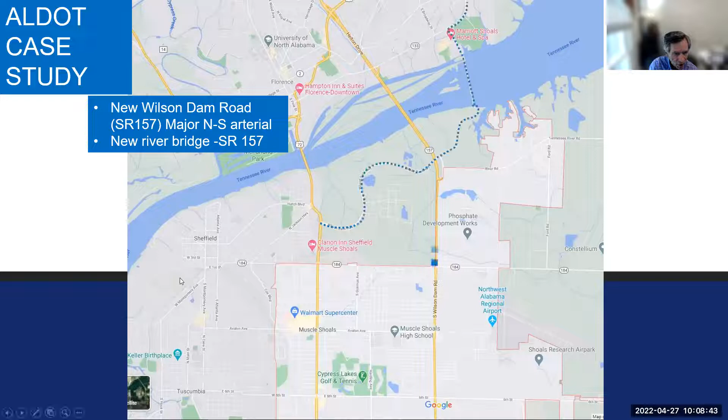When we left off yesterday, we were talking about a project in the northwest corner of Alabama. It's basically a new alignment for Alabama 157, State Route 157, which became a second major crossing over the Tennessee River. Before this project was built, there was basically one primary arterial, US 72, over the Tennessee River, so there were a lot of routes converging in this area with a single river crossing on US 72, aside from the 2-lane road over the Wilson Dam.

So we were going to look at this. We went through these slides yesterday and looked at the old Wilson Dam road, just a simple 2-lane road. If you recall, it went over the Wilson Dam—I think it was very narrow lanes. Speed over this dam was probably about 20 miles an hour tops. It was very narrow lanes—I don't know the exact width, but very, very narrow.

This is a shot of the new roadway, Alabama 157, the additional river crossing that was built—I'm not exactly sure when, probably 15 years or more ago. I don't know the exact time frame, but it's been there for quite some time. You can see here it's got shoulders, a raised median, curb and gutter on the inside, improved paved shoulders, rumble strips on the outside. This is just an overhead shot from Google Earth, Google Maps of the facility. You can see it's a full width bridge with shoulders, 3 lanes in each direction, and it actually has a protected pedestrian area over the river.

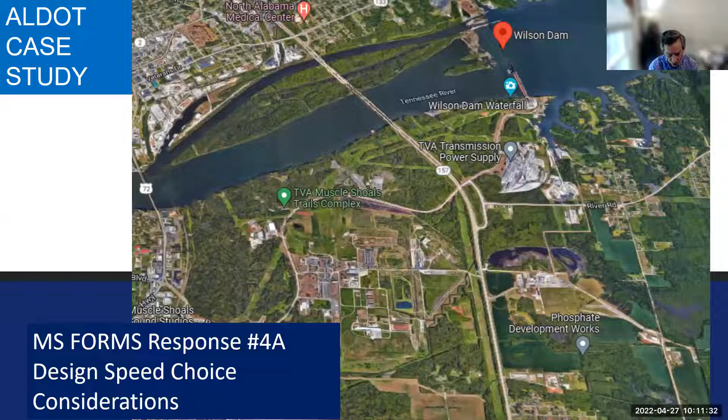So what I'd like for you to consider—and we're going to bypass this, guys, on 4A, we're not going to use that link, so no need to put that in there. I think to expedite this process, we'll just do it over chat. So thinking about the roadway, what are some things you would consider as far as selection of a design speed? Are there some overwhelming things that would be of concern to you?

It is relatively level on this roadway. Even though it's in an area that has a lot of change in elevation around the river, in this area south of the river it's fairly level, maybe rolling a little bit away from this particular route. But anyway, it would be considered level.

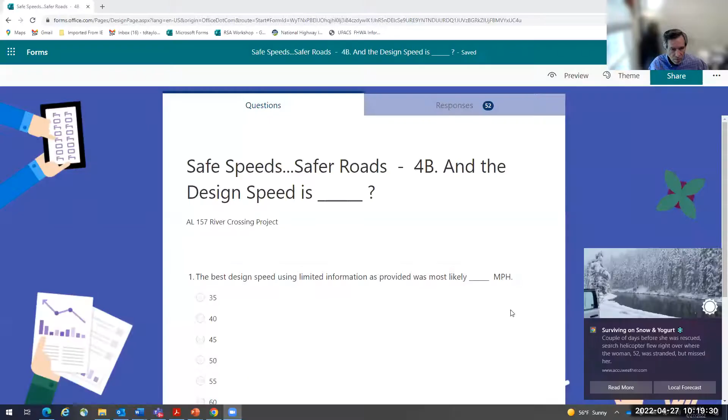Let's call this for the selection of the design speed and see what we got here. All right, looks like the winner right now is 45 miles per hour for the design speed, followed by 50 miles per hour getting a good number of votes. Trailing that is 55 coming in third, and 40 miles per hour coming in fourth place, with a few choosing 65, 60, and even 35.

So for those who chose over 45, that group is about the same size as the group choosing under 45 - it's pretty close. So it's interesting that these responses show the winner is 45, with 50 coming in second, then 55.

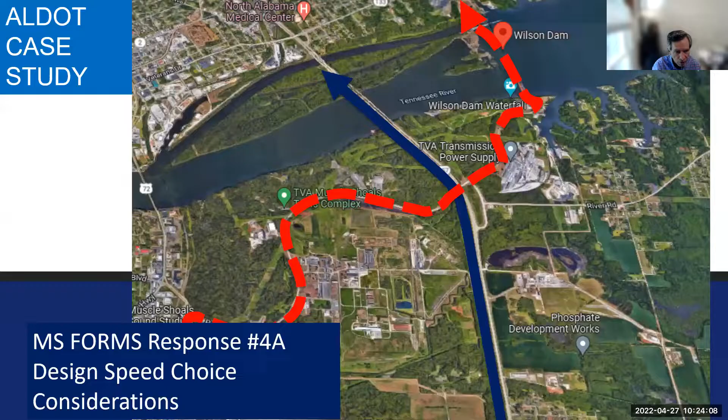In this case, this particular photograph shows 7 lanes, and going back to some of the other ones, from this perspective it was 3 lanes. Again, the look and feel of the roadway, I think most everyone would agree, suggests more than 45 miles per hour.

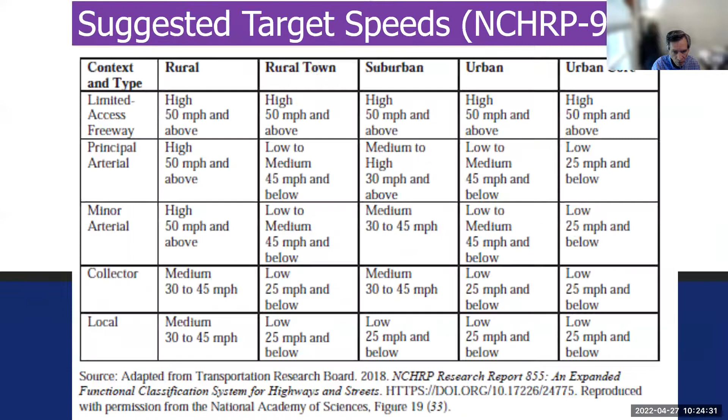So what happened is a speed study was conducted, and the speeds ranged anywhere from 54 to 63 miles per hour operating speed, with the average probably lower but an upper range of 63 miles per hour. Using the information available at the time, the speed limit was changed to 55 miles per hour. I think the point here is that design speed is not always a good predictor of operating speed.

Now, target speed is an attempt - not to blend the two - but to design the roadway in such a way that you achieve a desired operating speed. On this particular roadway, you have to ask: is 45 a desirable speed for motorists, given the context, et cetera?

Some would probably say, well no, it's really not, it should be a little higher. There are some that would say it should be a little lower. But the range of speed that was chosen, this 54 to 63 mile per hour range, was generally the range of speed selected by the motorists.

Certainly as development comes along here, it's good to change some of this, with more access and things like that along this roadway. There may be a need to recheck the speed, pending any change that might occur along the roadside environment or the roadway itself. So that's just a deeper look into the difficulty of making a comparison between the design speed and the operating speed, as pointed out yesterday.

All right, so in this module we're going to look at the different aspects of some of the current methods of setting speed limits. We're going to look at some of the injury prevention considerations for all users, approaches that deal with setting speed limits, such as safe systems, trying to minimize the injury that occurs when crashes do take place. How can we minimize injury by looking at speed and considering all users?

We're going to look at the 85th percentile, and some agencies consider that the gold standard, so to speak, and use it strictly, while others just incorporate it along with other considerations and factors.

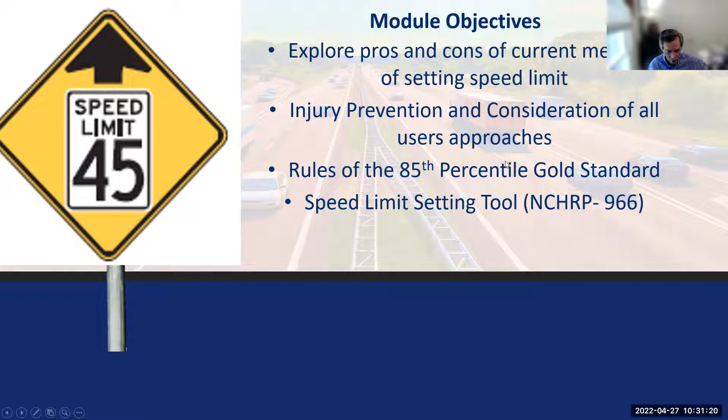We're going to spend a fair amount of time looking at this speed limit setting tool, which I think is a unique tool that can aid in selecting the appropriate speed, and other expert systems as well. This speed limit setting tool was designed to help practitioners assess and establish consistent speed limits, and combine engineering studies with context considerations. Don't just look at the engineering study as being a collection of speed records that would produce a speed distribution, and then selecting a specific point on that distribution to arrive at a speed limit or posted speed. It's intended to be an objective, unbiased, and consistent process.

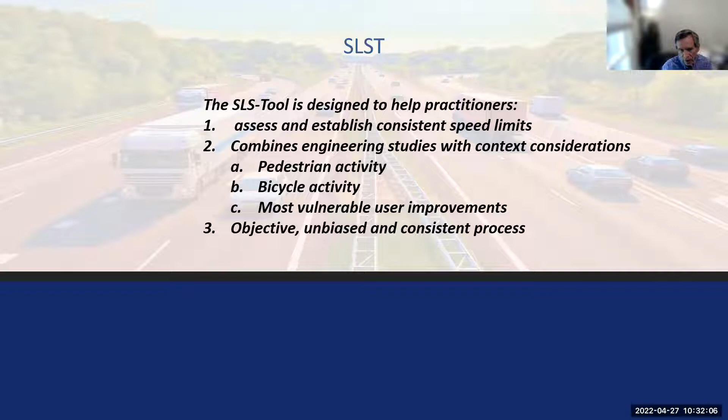First, as a review, let's look at the 85th percentile rule laid out in the MUTCD. The early research centered on rural roads, and that's one issue some folks have with using the 85th percentile in urban and suburban areas—the research was really based on rural roads.

It relies upon the driver's reasonableness and prudence. That's why you have the 15% that we're not necessarily saying are unreasonable, but they're going to be the most egregious offenders—people always driving too fast. You're always going to have a 15th percentile, no matter what the speed is, and typically those are the drivers going too fast, the ones that should be ticketed.

Another thing about the 85th percentile is that it's reactive—it's not really set up to address future contexts and changes to the roadway that could occur, so to speak. That's something we talked about yesterday: are speed limits only lagging indicators, or can they be leading indicators? Should they be? Just as with signal warrants, which are often based on projected traffic, should speed limits be based on projected context and changes to the roadway?

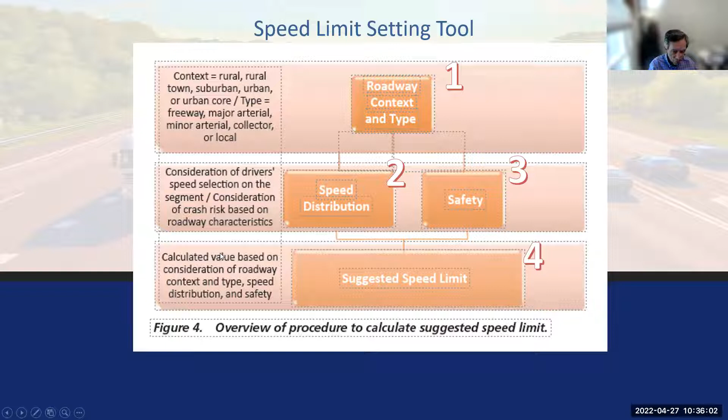The speed limit setting tool is built around four key steps: determine your roadway type and context, look at your speed distribution, and look at the safety aspect in terms of crash records and problems occurring along that section of roadway. From that, you arrive at a suggested speed limit for the particular roadway.

All this comes from NCHRP Report 966, and it uses this roadway context and type, as I discussed yesterday, for arriving at a target speed, similar to that.

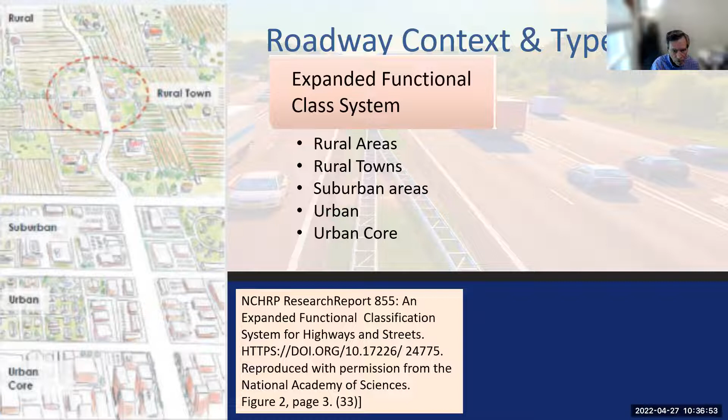So you have rural areas, which would be totally rural. Then rural towns—maybe towns of less than 2,000 people, still considered a rural town. In that area you'd have a different set of conditions determining a suggested speed. Then you have suburban areas, urban, and downtown urban cores. So those are your five areas.

From that, you determine your functional class—in this case, rural town, suburban, urban, and urban core would be your functional class. You'd choose that based on density, land use, and any setbacks such as sidewalks, streets, parks, on-street parking, things of that nature.

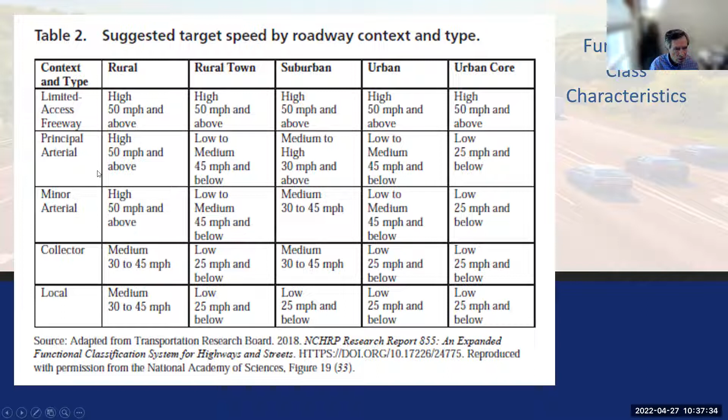And then you go to your suggested target speed by roadway context and type. We looked at this yesterday and then again this morning. So that's just the same table there that you would use to build that from.

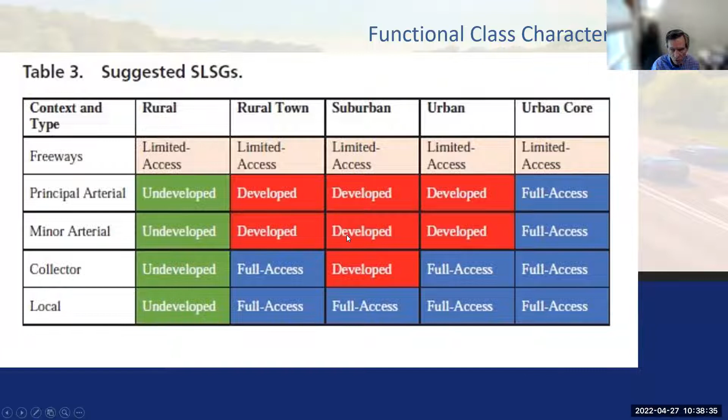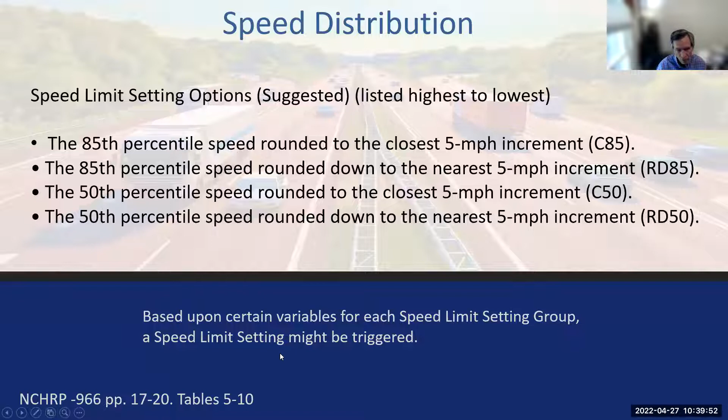So your inputs from working through this are your roadway segment inputs, you have about 23 of those. Crash data, you have about 8. And speed data, you have about three of those.

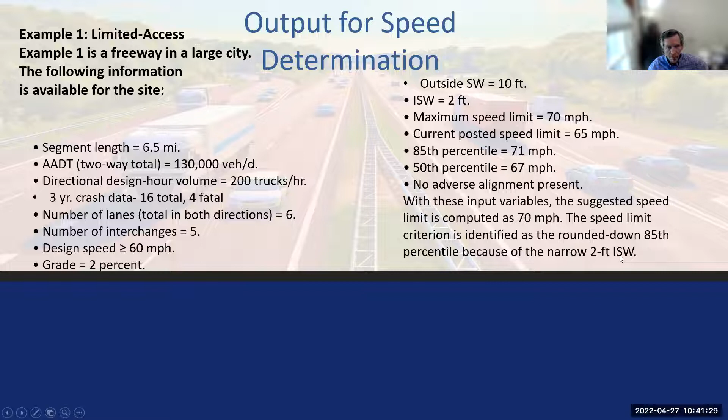So with all these input variables, the suggested speed limit is computed as 70. The speed limit is identified as rounded down, or RD85, because of the narrow 2-foot inside shoulder width. So this is essentially what it looks like when you're using the tool. And again, I know it's hard to see from this, but you can download the tool from the TRB website. It gives you your different input areas for speed data, site characteristics, crash data, and then basically it gives you the suggested speed limit of 70.

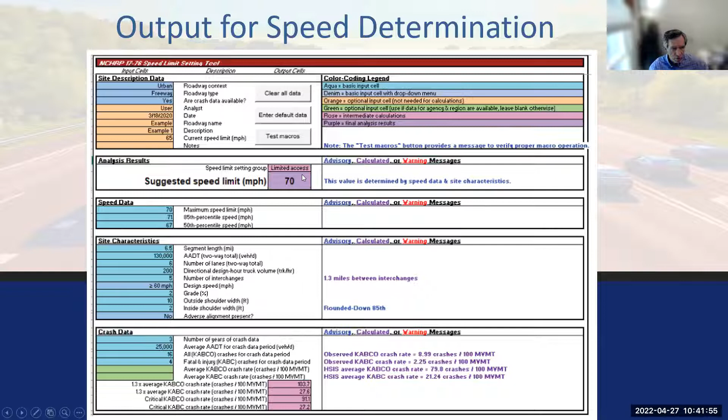So that's one tool that's out there. I think it's got a lot of potential, and there may already be some agencies using that particular tool. But I want to look now at some other expert systems that are in use.

I do want to revisit the MUTCD because I know with the notice of proposed amendments that came out last December, and then comments were due by May, there were a lot of comments and you can go in there and look at it yourself. There were a lot of comments to the docket on 2B on setting speed limits. There were some changes proposed in the NPA related to speed limit setting, and there were a lot of comments both for and against the changes. So it's going to be interesting to see how those come out. That's pretty much all I can say on the NPA at this point.

But the current, the 2009 edition, does require an engineering study, and it has to be set in 5 miles per hour increments. So you can't have a speed of 82 miles per hour.

It's not the good, the bad, and the ugly. It's the shall, the should, and the may. The should, or the guidance, is that the 85th percentile should be used, and it should be within 5 miles per hour of the 85th percentile.

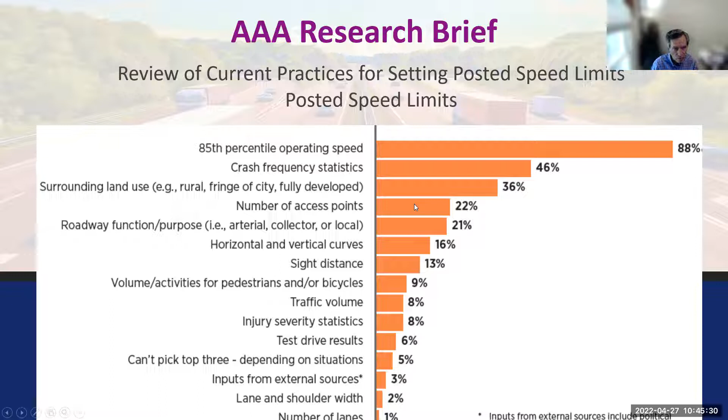So these are all the other factors, if you wanted to look at other factors, or outpace the use of the 85th percentile, when you sum them all up. So I thought that was interesting. That comes from AAA.

The SAFE systems approach is based using that particular approach—based solely on a road safety platform. The SAFE system approach attempts to minimize injury to the road user, whether it's pedestrian, motor vehicle driver, occupants, etc. So speed limits are set according to the crash types that are likely to occur along that particular roadway.

If it's a roadway where you don't have much chance of rear end crashes, then that's taken into consideration. If you don't have much chance of right angle crashes, that's taken into consideration. So all of these things will be taken into consideration in terms of your potential crash types, which would go back to your conflicts that are present along that particular roadway or along that series of intersections that could impact the selected speed using the SAFE system approach.

And it also uses the impact forces—that's the calculation of the speed and angle, and then the kinetic energy that's likely to be dissipated from that type of crash. This also considers the tolerance of the human body to withstand these forces.

So again, it's looking at impact forces, but also maybe you're in an area where there's a lot of senior citizens, and their tolerance to withstand forces are going to be less than what a 20-year-old may be able to withstand. So that could impact the choice of speed in certain parts of the country, certain suburban or urban areas, or different towns or cities based on that fact alone.

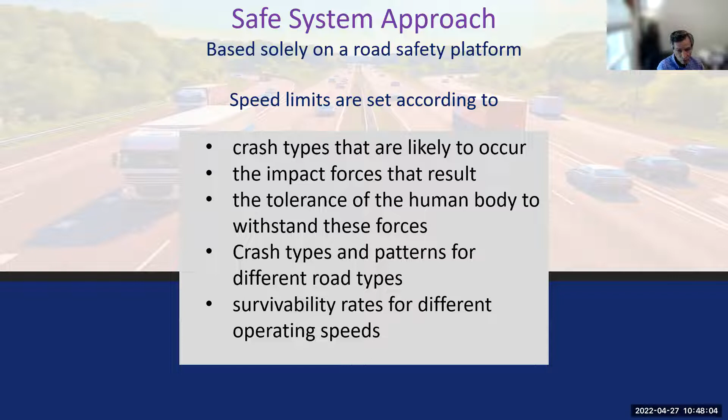And then the different crash types and patterns for the different road types is also a consideration, and then survivability rates for different operating speeds. So we know that if you choose a 70 mile per hour operating speed, then the survivability rates from right angle crashes are going to be slim to none, versus if it's a merge-diverge type crash at an operating speed of 70, then the survivability rate would naturally be higher. So all these things are taken into consideration to come up with these different speed limits.

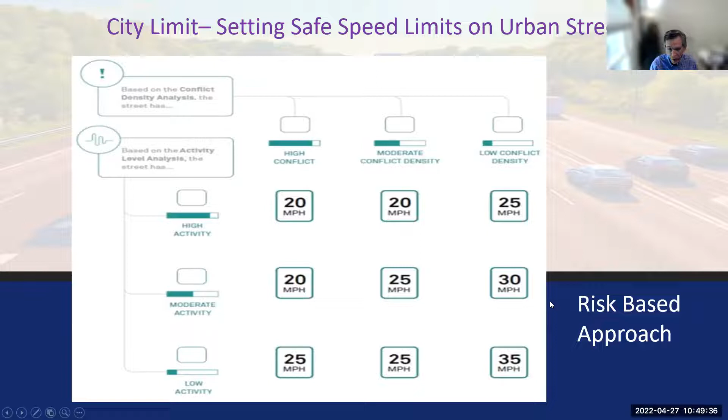There's also a NACTO approach, which is a risk-based approach focused really on urban areas, because it's the National Association of City Transportation Officials. It is a proposed risk-based system for setting speed limits, where you're looking at pedestrian and bicycle activity, location—is it a retail corridor, is it heavy sidewalk usage—bicycle paths or usage, shared use pathways. It's based on a conflict density type of analysis and the activity level analysis that the street actually has. So you can get more information on this particular risk-based approach by going to the NACTO website.

And there's also US Limits. I'm sure some of you are familiar with the expert system approach, US Limits. It is a decision rule-based expert system that uses tree logic and kind of mimics engineering judgment based on traffic engineering principles and experiences. It considers all factors such as geometry, traffic, operation safety, ADT, et cetera, as well as road users and context factors. It can provide the 50th or 85th percentile speed for usage as your speed limit.

Some examples of the decision rules are for streets and highways through developed areas: the recommended speed is based on access density, average signal spacing, the amount of parking use and activity, and the amount of pedestrian or bicycle activity. For example, if the ped bike activity is high, or there's a lot of parking activity, or there's more than 60 access points per mile, or more than 4 signals per mile, then the recommended speed is based on the roadway factors, which is the median speed rounded to the nearest 5 mile per hour multiple.

And if that access density is between 40 and 60 driveways, and let's say the area is either commercial or residential, then the recommended speed is the 85th percentile speed rounded down. So this is just some of the logic tree that is used in the US Limits 2 tool.

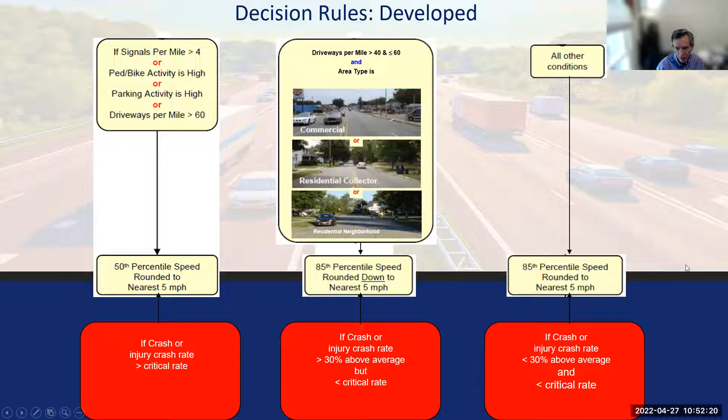There have been some complaints about US Limits 2, that it provides recommended speed limits that are too high, and that it really doesn't give enough weight to the other factors built into the decision rule logic. So we'll have to wait and see when US Limits 3 comes out, whether that's going to satisfy some of the people who had complaints about the earlier one.

Some additional information: Project 17-76 is guidance for setting of speed limits, available on the FHWA website. Project 1779 is the safety effects of raising speed limits to 75 miles per hour or higher, specific to certain roadways. And then there's information on the safe systems approach, setting safe speed limits on urban streets, with a user group and enhancements for use of the safe systems, and an expert panel involved in that as well.

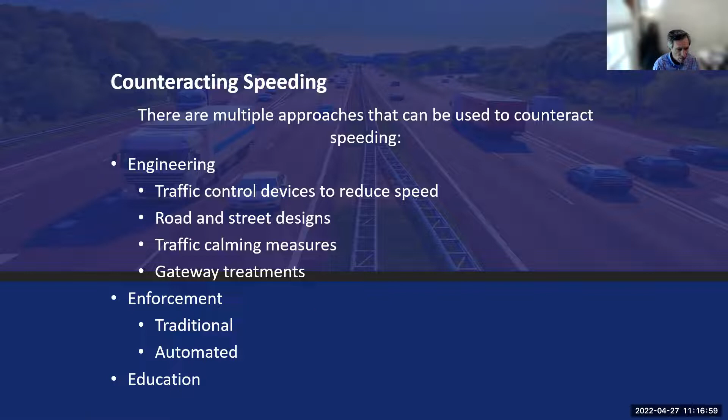There are a lot of ways to counteract speeding, with multiple approaches. We've been talking a lot about the engineering approach, and we're going to stay on that with traffic control devices, street and road designs, and traffic calming gateways. Then toward the end of today we'll talk a little about enforcement and education. So let's start with pedestrians and cyclists.

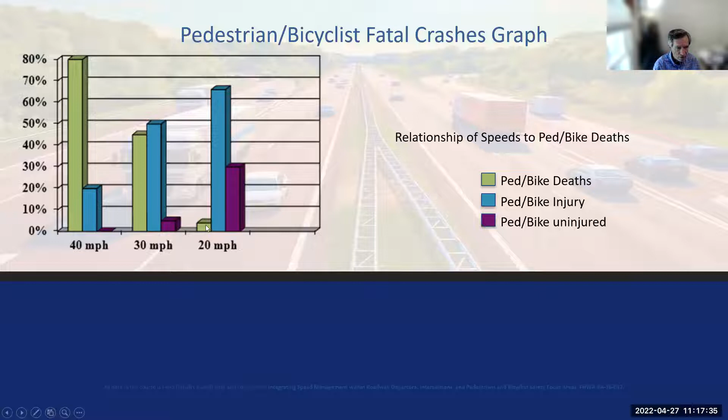If you look at this, speed has a lot to do with fatal crashes, and we all know this. At 40 miles per hour, you have a much greater chance of death if you're a pedestrian or on a bike and struck by a vehicle. You're still likely to be injured at 20 miles per hour, but the deaths are about 5%. So certainly there's an advantage to slower speeds for bicyclists and pedestrians.

One of the problems with safety issues related to speeding is that for pedestrians and bicyclists, it's hard to accurately measure safety issues. For one thing, pedestrians in most states can cross the roadway anywhere at any time, with the exception that most states have a law pertaining to crossing between two signalized intersections. Mid-block is against the law. But in most places, you can cross pretty much anywhere at any time as a pedestrian.

And so when you consider the rules of the road for motor vehicles, most state laws are heavily weighted toward motor vehicle traffic laws and rules of the road, whereas for the pedestrian there are almost zero rules of the road. So it's almost like herding cats, maybe.

It's difficult, because if you can imagine if cars and motor vehicles were allowed to go anywhere at any time along the roadway, they could create their own driveways by pulling off the road and crossing sidewalks where there's maybe a curb and gutter, and just drive and exit the roadway anywhere they wanted to, make a turn at any time they wanted to, mid-block or within an intersection. It would be total chaos.

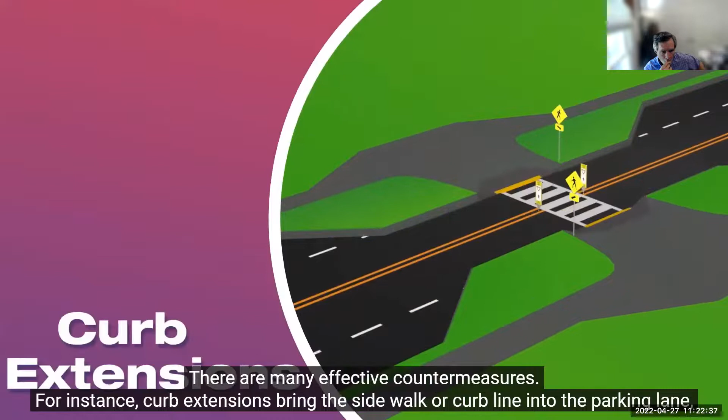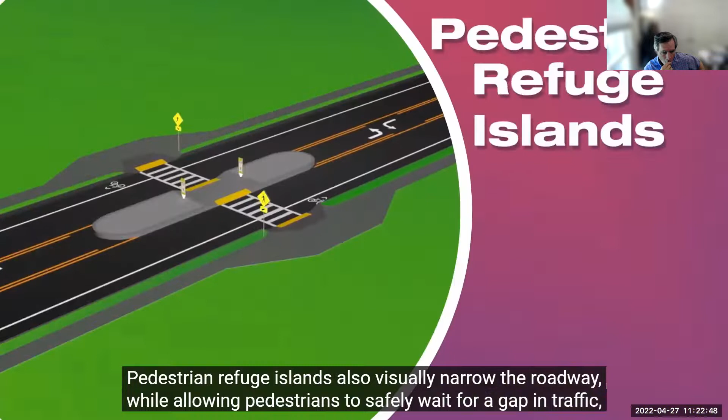So how can we slow cars down prior to mid-block pedestrian crossings and save lives? Glad you asked. There are many effective countermeasures. For instance, curb extensions bring the sidewalk or curb line into the parking lane, visually narrowing the roadway and improving sight distance between drivers and pedestrians. Pedestrian refuge islands also visually narrow the roadway while allowing pedestrians to safely wait for a gap in traffic, focusing on one direction at a time.

For two-lane crossings, raised crosswalks are a great option. They improve visibility by raising the pedestrian to a higher level and provide a raised platform to slow cars approaching the crosswalk. Road diets can reduce the number of through lanes and the lane width, which encourages drivers to slow down. Road diets also reduce the distance people have to cross and create space for other safety countermeasures such as refuge islands and curb extensions.

Slower vehicle speeds at crossings save pedestrian lives. Contact FHWA for more information on these and other life-saving countermeasures.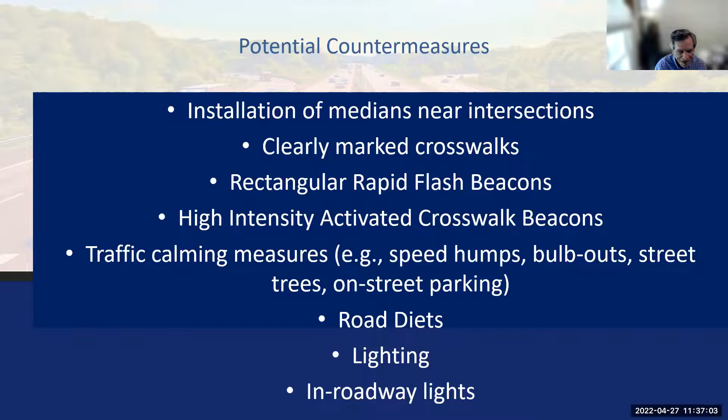All right, just trying to make sure I got all my screens up and down. So some of the potential countermeasures, some were pointed out in the video, and some of these may be repeats: installing medians near intersections, clearly marked crosswalks, rectangular rapid flashing beacons, high intensity activated crosswalk beacons or HAWKs or pedestrian hybrid beacons, pretty much all the same thing there. Traffic calming measures such as humps, bulb-outs, street trees, on-street parking, road diets, lighting, and in-roadway lights are some of the ones that you can do.

So these we're just going to quickly run through, not spend a lot of time on. There is a lot of information about these different treatments on the FHWA website, Office of Safety website, either at intersections or looking at pedestrian safety.

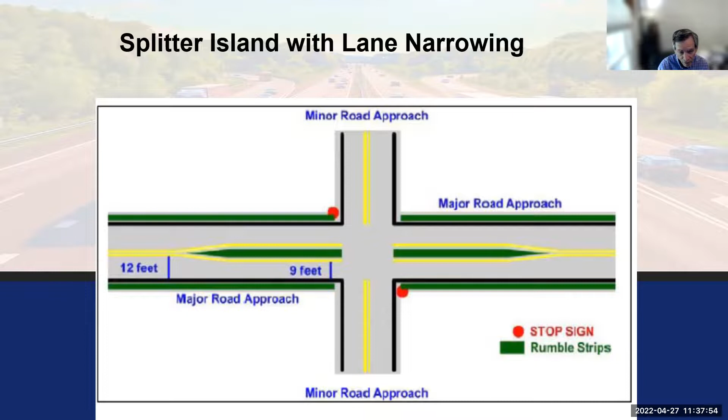Lane narrowing has been shown to reduce crashes. There is some research that shows you could have an increase in crashes depending on the type of roadway where you're doing this lane narrowing. Typically this would be more appropriate for your local roads, collectors, and things like that, in urban and suburban areas.

You can do this with either striping, transverse markings on the center line, or you can do it with actual narrowing of the pavement width itself.

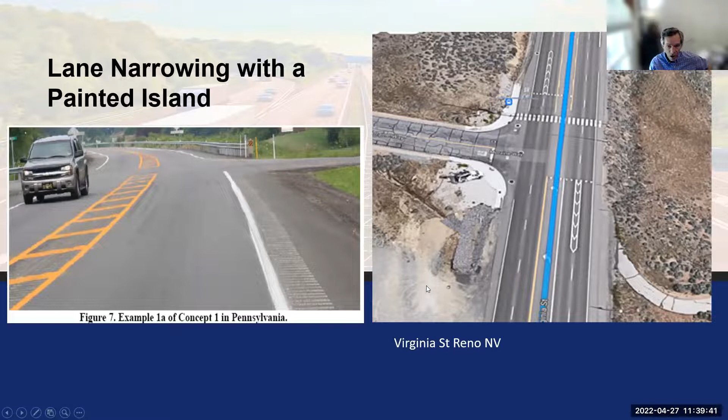But again, lane narrowing can reduce speeds, not by a great amount, but as we saw in the video it can have tremendous impact. Based on a study in I think three different states, North Carolina, Virginia, maybe Pennsylvania, there was an average of 4.5 miles per hour reduction in speed just from the lane narrowing.

And then as far as crash rate, there was a 31% reduction in crashes based on those sites, actually Pennsylvania, Kentucky, Missouri, and Florida.

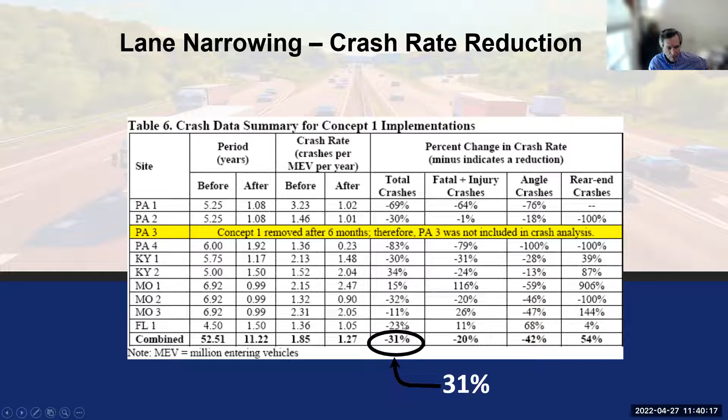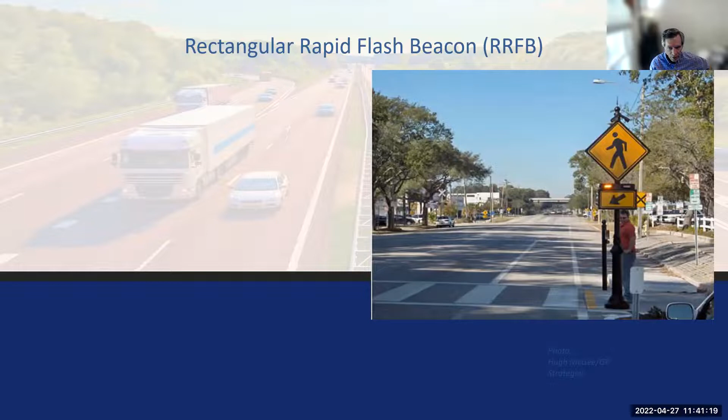And then rectangular rapid flashing beacons. These are very popular since the interim approval, and then the MUTCD team pulled the interim approval away, but now it's back. So these are likely to be in the next edition of the MUTCD.

One thing about these that some people do not take into consideration, from my observation of a number of these things across the country, these LEDs, if you look at this picture on the right, are fairly small. There are no stipulations in the interim approval that say these cannot be increased. There's a minimum size, but nothing about a maximum size. So if you think about these in terms of the square inches of these LEDs compared to a 12-inch signal head, they are almost non-existent.

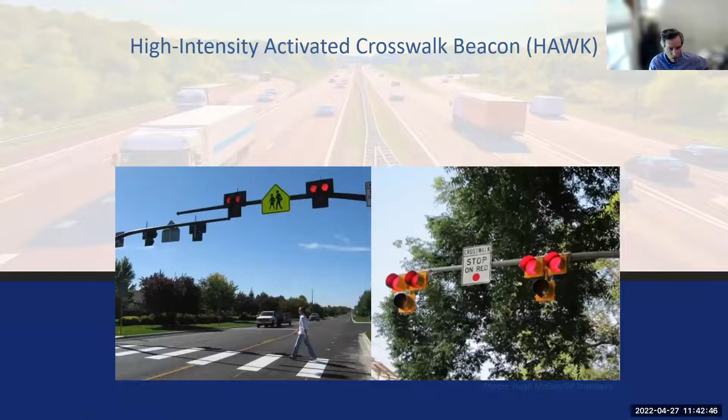And then HAWKs or PHBs are another way to slow speed along corridors, where you're providing for safe pedestrian crossings. And then there's vehicle driver activated signs, driver feedback signs.

These can be permanent or targeted, short term use. They can be portable, on trailers or things of that nature. These can be effective where they only illuminate whenever someone is in excess of the programmed speed. So if the speed limit is 20 miles per hour, when someone is over the limit, or maybe 5 miles per hour over, the sign would only be activated at that time.

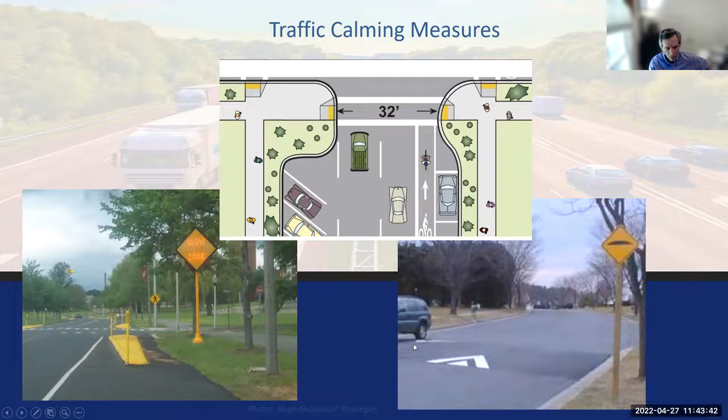Road diets are good at perceptually narrowing the footprint of the roadway. They bring all users in tighter, where the motorist is more likely to actually see the pedestrian due to that cone of vision and the speed of travel.

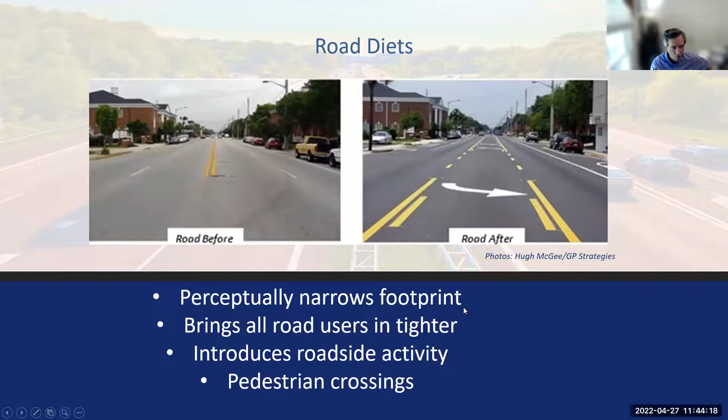It does introduce roadside activity, which is a component of a driver choosing a speed. If you're in an area with schools and children along the sidewalk, you're more likely to adjust your speed than if it's just a simple shoulder with no activity. And then most road diets provide for pedestrian crossing.

Lighting is key. We did see earlier that 60% of pedestrian and bicyclist fatalities occur between the hours of 6 p.m. and 5 a.m. So lighting is critical.

I would also mention that the type of lighting matters. Some studies have shown that lighting offset from the pedestrian crosswalk is better, because it actually shines light on the pedestrian himself or herself, as opposed to just creating a shadow with it being directly overhead. So anytime you can illuminate the pedestrian, it's better than illuminating the crosswalk.

Not that you're going to do both, but you can, depending upon the position of the lighting. It's typically a little bit upstream and a little bit downstream of the crossing to get the most light on the pedestrian, as opposed to just being directly overhead.

I've got a video here I want to play, but I have to give a disclaimer because there are some graphic images in it, footage of pedestrians struck by motor vehicles. It is a foreign documentary on the effects of speed on pedestrian-vehicle related crashes.

The depictions show no blood or injuries close up or anything like that, but the video is shown for its value in understanding the vulnerability of pedestrians using the right-of-way, and the impact adjustments in speed can have on the severity of such crashes and whether or not a crash occurs.

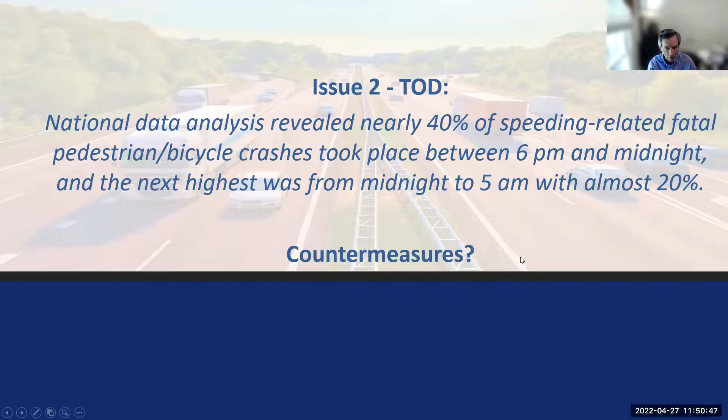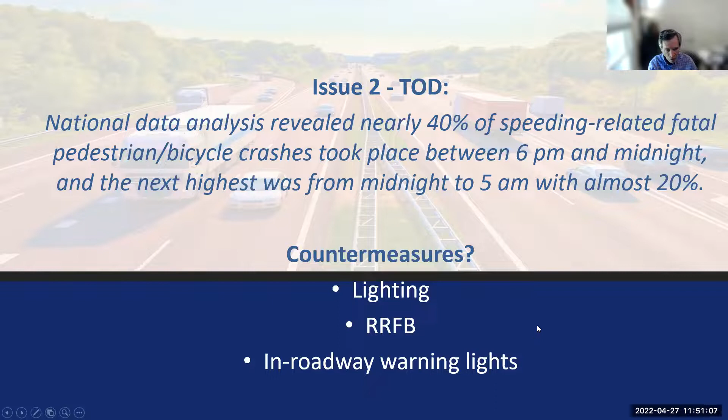40% of speed-related fatal crashes or pedestrian-bicycle crashes took place between 6 p.m. and midnight, and the next highest was from midnight to 5 a.m. with almost 20%. So what can you do? We talked about lighting. RRFBs are another great one because they're pedestrian actuated, and in-roadway warning lights as well - aside from pedestrian activation, you can use motion-type detection so that if pedestrians don't push the button for the RRFB, it can still be triggered.

The majority of speed-related fatal crashes do not take place in intersections. What can you do? That's a lot of the difficulty in that category alone. Median islands or refuge islands, and pedestrian hybrid beacons can help. Barriers that channel and funnel pedestrians to a preferred location, such as a mid-block crossing, rather than crossing somewhere other than that location, are useful too. Anytime we can provide information to pedestrians - such as cross on the other side, or there's a crossing 200 feet down the road - that communication matters.

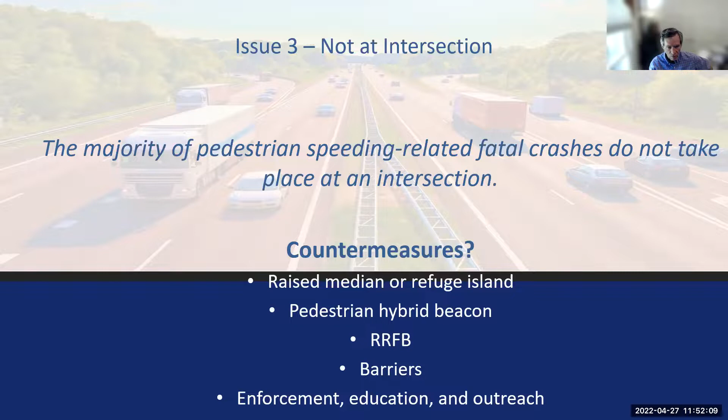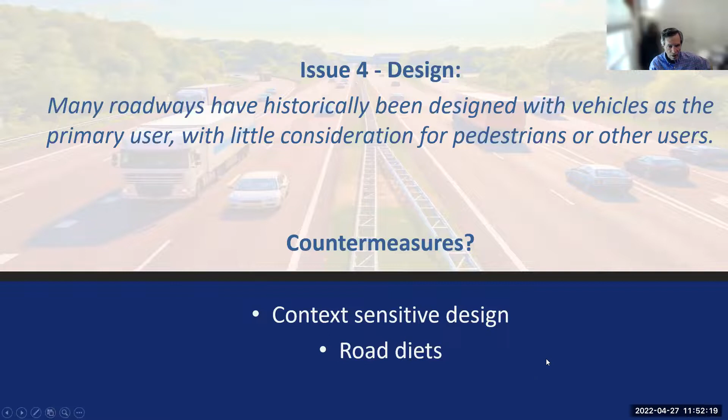What are some other additional countermeasures or context-sensitive designs, and road designs for including all pedestrians and all users?

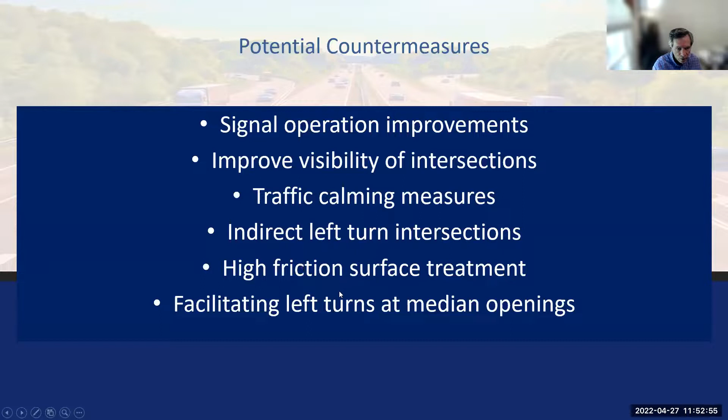Signal operation improvements could be one, improving the visibility of intersections, traffic calming, indirect left turns, using high friction surface treatments, and facilitating left turns at median openings.

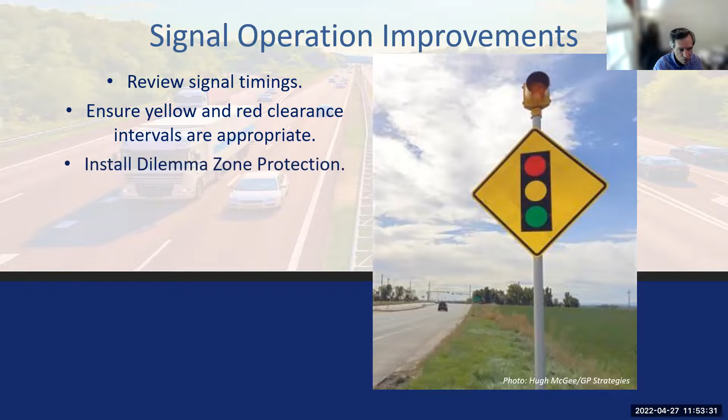Just a review of signal timings can sometimes help, making sure you have adequate yellow and red clearance intervals so motorists aren't caught off guard and having to speed up to make it through the light. We don't want motorists caught in the dilemma zone where they tend to make more errors in judgment - we want to eliminate that so it's clear whether they should stop or continue.

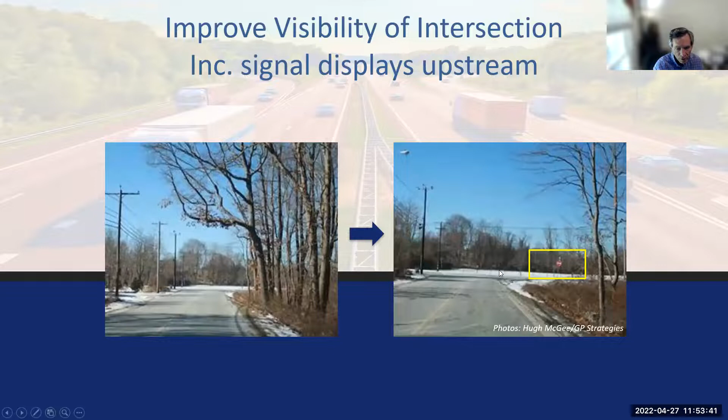Coordination of signals can be appropriate, and using advanced warning signs to make intersections more apparent and conspicuous - making your signalized intersections and signals themselves more conspicuous, using reflectorized backplates, and mounting on mast arms versus span wire can also improve the conspicuity of traffic signals.

Reducing potential conflicts, such as left turn movements and crossing conflicts, can be done either through changing phasing or by using alternative intersections - indirect left turn intersections such as median U-turns, restricted crossing U-turns, and J-turns. Any number of things can be done to reduce those conflicts, not just changing phasing.

Then assessing signal progression impact - what impact is being made by having signal progression? Is there a negative effect or disbenefit? Has there been an increase in crashes with signal progression, or a decrease in speed with timing adjustments to the bandwidths of different cycles and intersections?

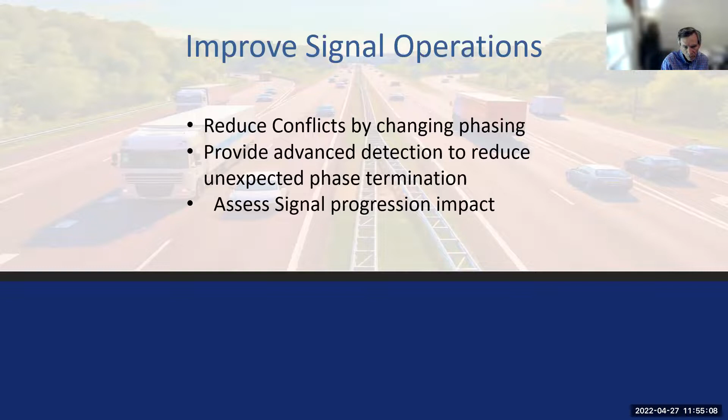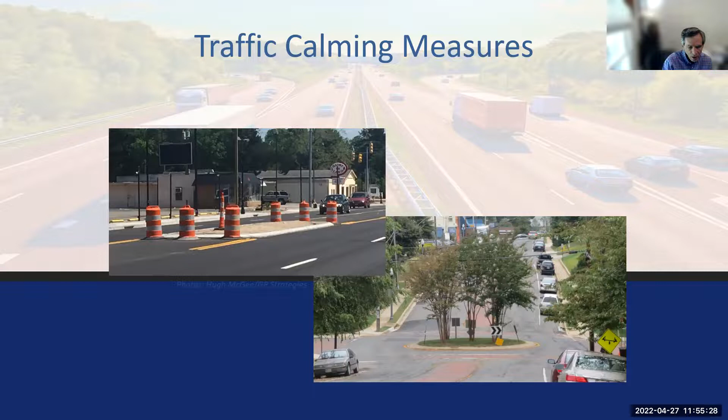Doing that system-wide too. For unsignalized intersections, you can improve visibility of signs, and traffic calming measures can help as well, whether it's chicanes, raised median islands, or mid-block crossings. Indirect left turn intersections can not only reduce the number of crashes, but also reduce speeds through these types of intersections.

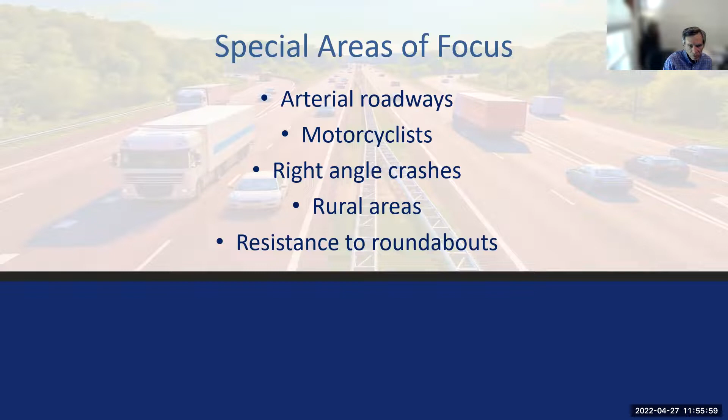Special areas of focus would be arterials, motorcyclist crashes, right angle crashes in rural areas, and resistance to roundabouts is another focus area. Roundabouts have certainly been proven over the years to be a tremendous safety benefit and provide speed reduction through intersections as well.

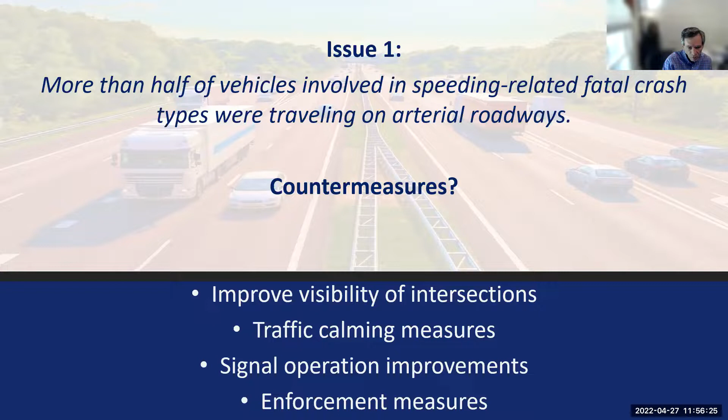A lot of the problem is on arterial roadways where these speeding-related crashes are occurring, and a lot of these countermeasures are appropriate for those particular roadways. Motorcyclists have a high risk of being involved in speed-related crashes, so targeting education campaigns, making the conspicuity of motorcyclists better, and emergency response training are important. A lot of this gets into speed management type programs as well, and may address some of your strategic highway safety goals and plans.

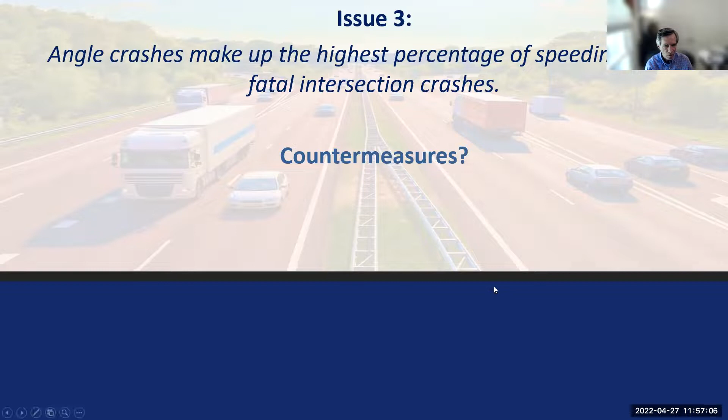Without question, the highest number of speed-related fatal crashes involve angle crashes at intersections. So promoting things like roundabouts and mini roundabouts, having U-turn based intersection designs, and using automated red light enforcement can help.

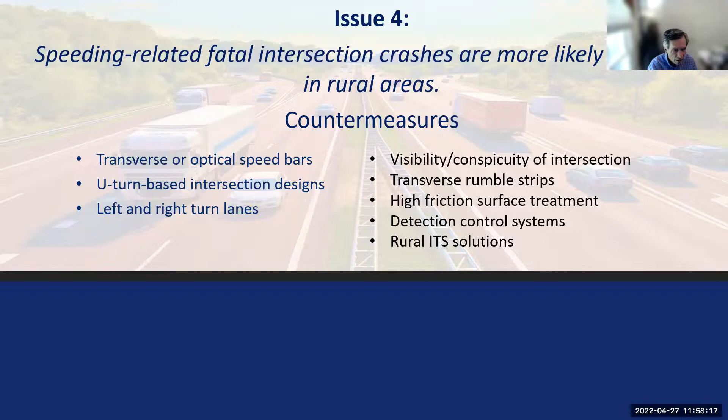Speed-related crashes are really a rural and local problem overall. Not to say there aren't problems in urban areas, there are, but speed-related fatal crashes are particularly a problem in rural areas. So you can do things such as enhancing visibility of intersections, providing rumble strips, high friction surface treatments to improve braking distance, and detection control systems — rural ITS solutions such as intersection conflict warning devices that alert motorists of vehicles in or approaching the intersection. Using transverse and optical speed bars gives drivers the perception they're traveling faster than they actually are, and using U-turn based intersection designs and providing left and right turn lanes also helps separate faster traffic from slowing traffic.

There's still a lot of public perception about roundabouts and mini roundabouts that isn't conducive to promoting or constructing them. So there should be education and outreach about these, showing life cycle costs and savings benefits, and the success other agencies have had from roundabouts.

I want to quickly go through lane departure. Lane departure is any type of crash which occurs when a vehicle either crosses the edge line or center line or otherwise leaves the travel way. I defined that yesterday and gave examples of it.

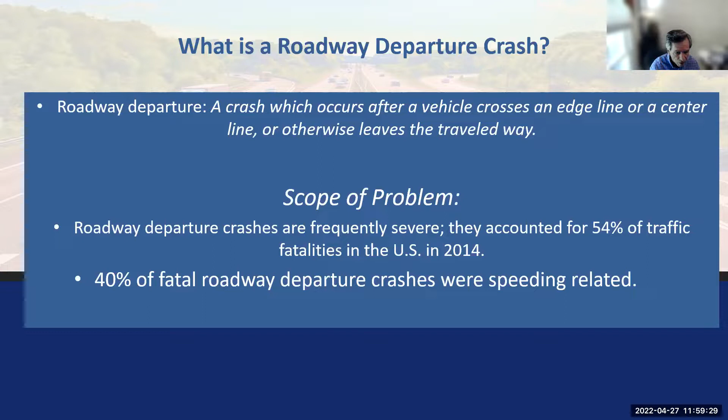Not surprisingly, 40% of fatal road departure crashes are speeding related. A great majority of these crashes occur at horizontal curves, even though curves represent a very low portion of overall roadway miles. So the goal is to keep vehicles on the road and minimize the consequences of leaving the road, reducing head-on or serious crashes.

Some of the information helpful in diagnosing the problem includes determining crash types, whether speed limits are excessive in some areas and should be reduced, horizontal curve alignment in terms of warning signs and advisory speeds, driver characteristics, what time of day crashes happen, what vehicle types are involved, and of course roadway geometry.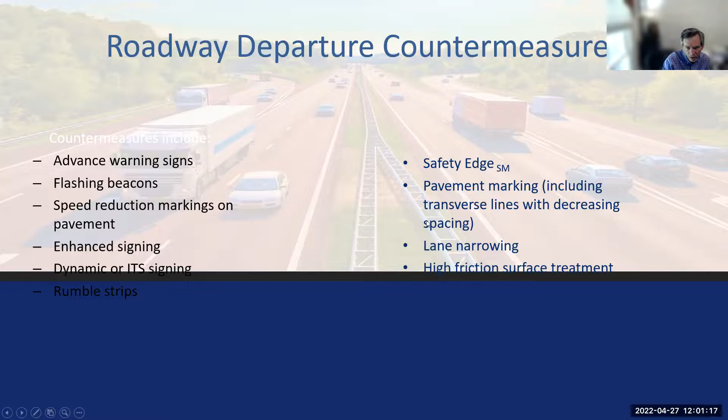Some of the countermeasures include advanced warning signs, flashing beacons, speed reduction markings, enhanced signing, rumble strips, ITS-type signing, safety edge, pavement markings including transverse lines with decreasing spacing, lane narrowing, and high friction surface treatment. Advanced warning signs are one of the keys to combating roadway departure crashes because they often happen on horizontal curves or turns.

Using flashing beacons and special chevrons, or LED-embedded signs, can be advantageous where you have problems on curves — not that you put them on every curve, but based on recommendations in Part 2C of the manual related to the change in approach speed, the difference between the approach speed and the advisory speed of the curve. If that difference is pretty significant, you'd want to use more advanced treatments than those described in the MUTCD.

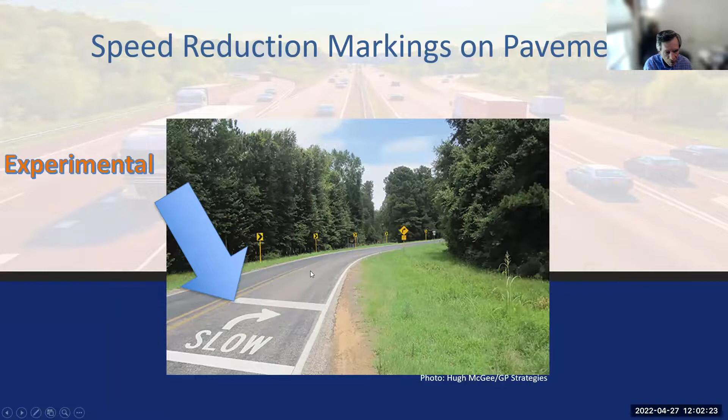Some agencies have experience with these arrows and similar treatments. They are experimental, and I'm not necessarily a big advocate of that, since it conveys a dual meaning for both turn lanes and curves.

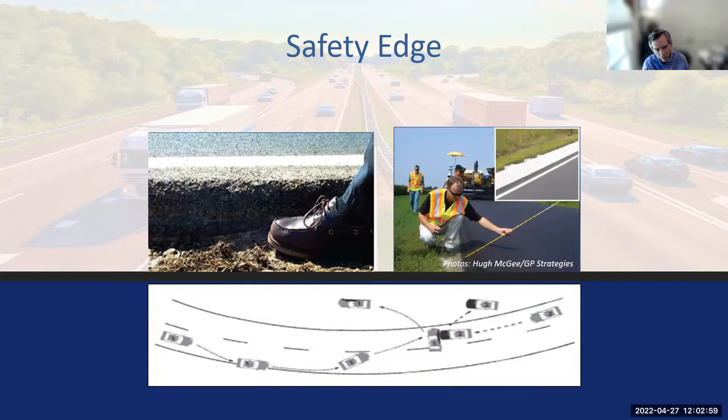Enhanced signing through curves: dynamic signs that are only illuminated or flashing whenever your speed is in excess of the speed that's programmed into the controller. And then rumble strips along center lines and edge lines, dealing with pavement drop-offs, using the safety edge to combat these types of drop-offs that can occur from vertical faces.

And then special pavement markings. These are the optical bars that can give the driver the impression they're actually traveling faster as they approach the curve, helping them to slow down.

And then some others are lane narrowing, transverse patterns of markings, wider edge lines and center lines, and using more restrictive markings on the approach to crosswalks and things of this nature for pedestrians, and even for lane departure. I wanted to show this concept of increasing the degree of control.

Where you may be focused on finding a gap and selecting a speed, you may not be focused on the pedestrian. So you want to make sure you're doing things to promote traffic calming on the approach to crosswalks. You don't even have to use a double white line - you can use a wide single line, as opposed to just a broken line, to enhance the degree of control, providing more traffic control for motorists and the safety of all users.

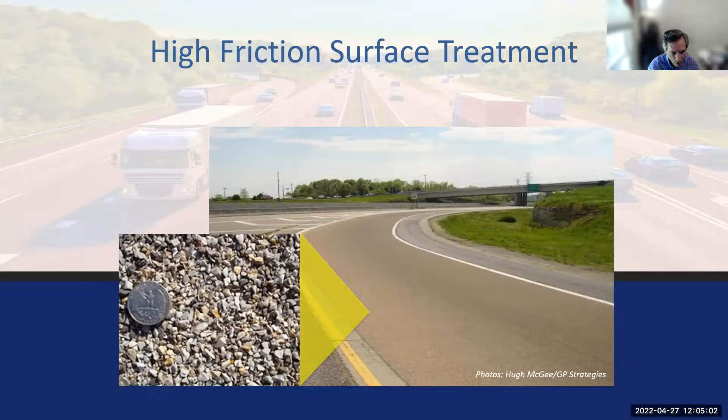High friction surface treatments in curves can also minimize the effects of speeding in curves, because motorists don't realize they're actually on a more resistant pavement, and it will allow them to brake at a shorter distance. So this won't necessarily decrease the speed, but it will provide accident reduction benefits.

85% of vehicles involved in speeding related roadway departure crashes were traveling on local, collector, or arterial roadways. So that's a pretty big group - I think that's over 80% of the entire picture, with local and collectors being about a third, and arterials being about, I think, another, probably a little bit more than a third.

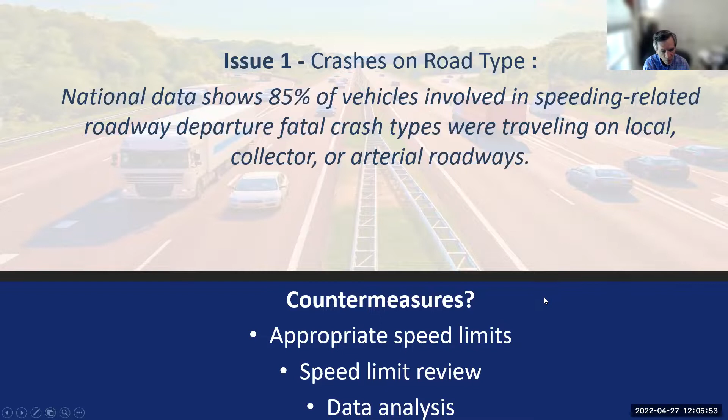So using appropriate speed limits on these roadways, speed limit reviews and data analysis where you're having these types of problems related to lane departure, roadway departure, is good to have that data available.

This tends to be males, particularly drivers age 15 to 20. We know these are part of the larger group in terms of fatal and serious injury crashes. So what are some specific countermeasures? Well-targeted education programs, working with other partners and stakeholders, and using high visibility enforcement where you're doing targeted periodic enforcement along certain roadways.

Other countermeasures for curves would be ITS signing, dynamic signing, high friction surface treatment, safety edge, pavement markings, rumble strips. Even standard curve signing has a crash modification factor associated with it.

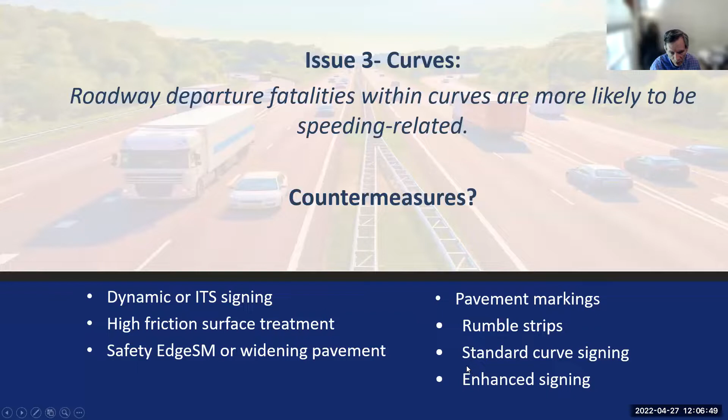And then enhancing the signing - wherever you have known problems or crash rates that exceed the average, you should be using some type of enhanced signing, whether that's fluorescent yellow sheeting or some type of marking or reflectorized sheeting on the poles themselves or posts.

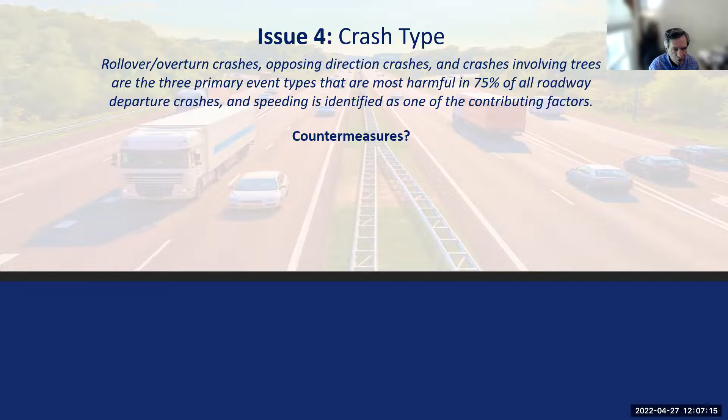Rollover and overturn crashes present a problem. Crashing into trees is also related in about 75% of all road departure crashes. So having good data on where your different fixed objects are in proximity to the roadway, keeping vehicles on the road is one of the first signs or the first stages of strategies.

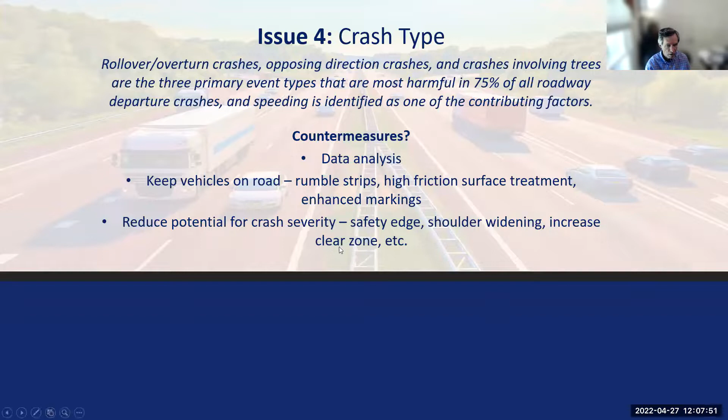And then reducing the potential for crash severity is the next line of defense. We can't keep all vehicles on the road, but if they do leave the road, we want to make sure we're providing as many safeguards as possible - things such as looking at clear zone, shoulder widening, and things of that nature, and safety edge.

So that's a brief look at some of the countermeasures. It's not an exhaustive list of countermeasures for all roadways, but certainly these are some of the bigger ones. A lot of other countermeasures really deal with the enforcement side of things and the education side of things, so I wanted to make sure I had saved a little time for that.

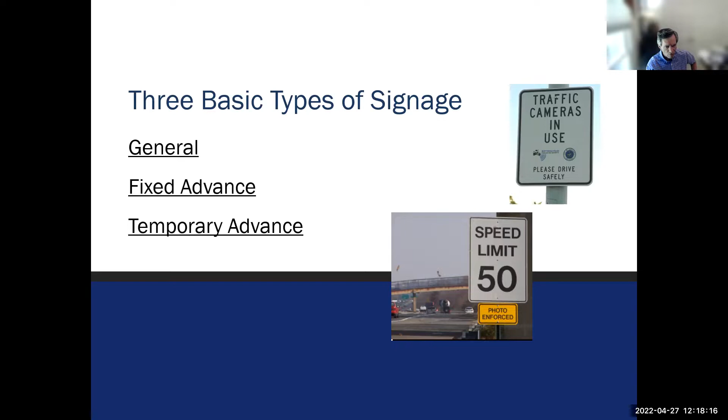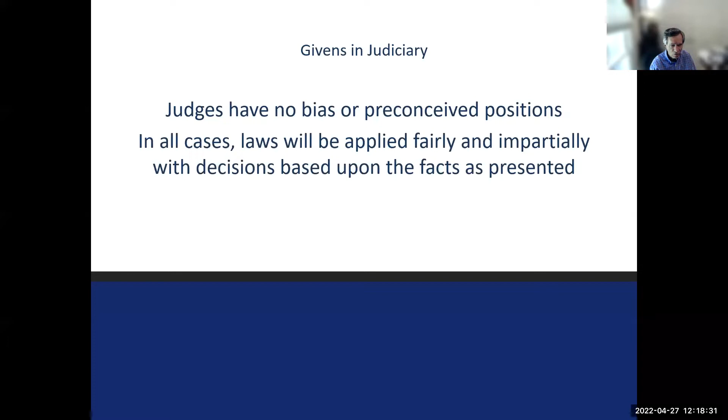As far as the judiciary is concerned, their role is that by and large, judges don't have any bias or preconceived positions, and they can't dictate to the states how to set the speed limits or to enforcement how to issue citations. So they don't get involved in whether he was 5 miles over the speed limit or 10 miles over. But in all cases, they have to apply the facts of each case fairly and impartially. Each state has a canon of ethics for their judges, and they can't compromise that.

For convictions, judges have to look at the absolute speed. Was there reasonable and prudent speed? Was there a failure to reduce? Was it reckless operation, or too slow for conditions, or was there some type of negligence involved? If it's reckless driving or something of that nature, it's certainly going to be taken into consideration.

Some of the factors for adjudication of citations and ticketing is it has to be swift, has to be certain, and has to have some severity of punishment.

Potential problems arise when advice is given to citizens, or judges or judiciary make statements to the media, or when enforcement is saturated without notifying the court. During these special emphasis times, that needs to be coordinated with the judiciary, so they know they're likely to see a lot more action in their court in a month or so, when these tickets start coming through the system. So just keeping them up to date of things that are going on.

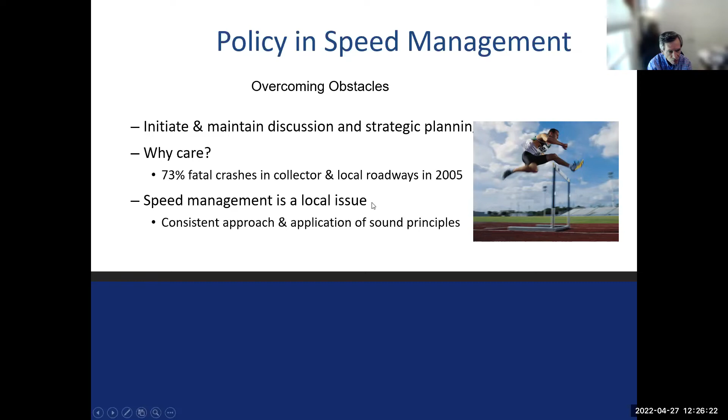As far as why we should care about this - 73% of fatal crashes are occurring on local and collector roadways. That's back in 2005, but this figure hasn't changed a whole lot. Speed management is really a local issue. There should be a consistent approach and application of sound principles.

So any public policy response, a framework should look like this: speed limits should be appropriately set, they should be rational, they should incorporate engineering treatments, and there should be enforcement of the egregious violators - those in excess of the speed limit, whether it's a 7 or 10 mile per hour allowance. Most enforcement agencies start at around 11 miles per hour in terms of issuing violations. Doesn't mean that's all, but enforcement should be targeting those most egregious violators.

There should be targeted enforcement at crash-producing locations, and there should be strong public communication efforts across the board between stakeholders.

A coordinated response looks like this, where you're bringing everybody together. You have leadership, you have a champion for speed management, and policymakers have to examine their problems from all angles before taking their issues to the residents.